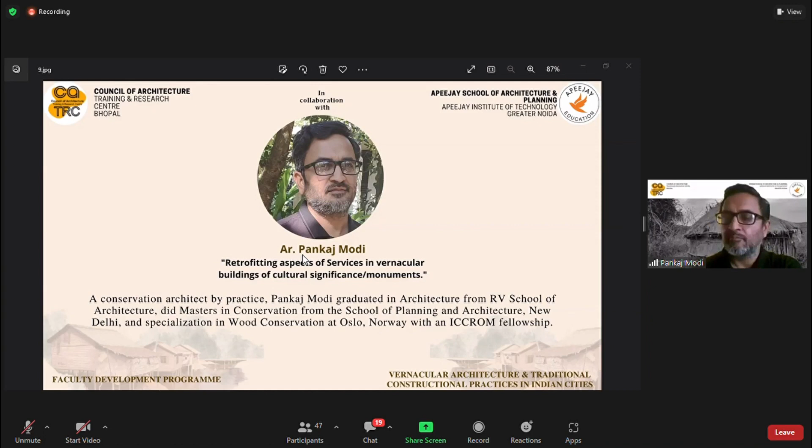So we welcome you. It may be repetitive because Balio and I work together on many projects for INTACH. He often is the contractor because he has a wonderful skilled team in traditional materials. So there may be some duplication, but I try to present it from a different angle for the same projects.

I'll be talking on the services aspect - how the retrofitting takes place, and when we are doing interventions, what guides us, and what challenges we face, how we interact with other professionals, because not everything can be done by us. We still need the support of many other professionals, and it's important how that interaction happens, because they come from a different background and we have a different objective for the project. I'll explain that with the projects.

You've been hearing this, and I've attended many sessions since Monday, but just to reiterate: we are looking at vernacular architecture, which goes beyond just buildings - it goes to the settlements. We are talking of public buildings also, because we shouldn't think that vernacular is just the residence of a few people or communities. There are public buildings too. It's a style of architecture - materials, construction techniques. We are looking at how they've responded to socio-culture, traditional occupations, and the indigenous knowledge and systems that are developed, because they are very contextual.

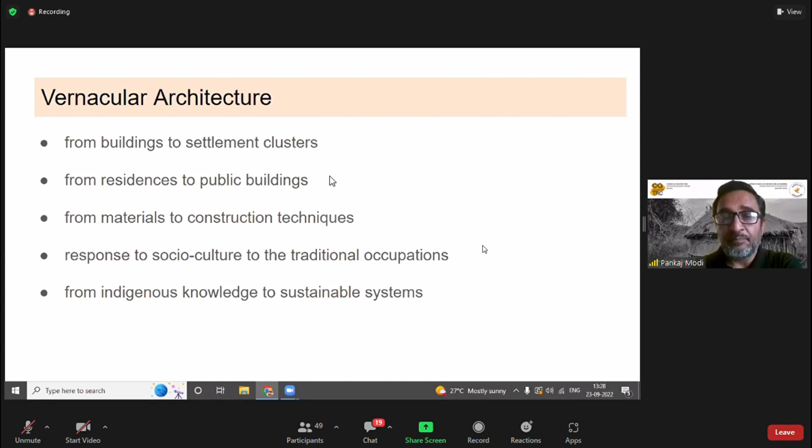One thing very important to understand, if we are calling vernacular a heritage, is that vernacular is an evolving thing. It has its continuity - it's a living heritage. It's got the living traditions, the living culture, and the living techniques, technologies, and materials.

So for whom are we doing these projects? When we are working on the restoration, the question is, whose project is it? Whose heritage is it? Are we going to look at it from our perspective, or is it the community who's living there or who's going to take it up? That big question is always important to ask at the beginning of any project, and there's no definite answer, but it needs to be thought about.

So what guides us when we are doing conservation? Across the board of conservation projects, many things guide us. Of course, there are legal laws by ASI and the state departments, but there are also certain guidelines at the international level called charters. There's this scientific body called ICOMOS, which is also an advisory body to UNESCO, and they have prepared many different charters.

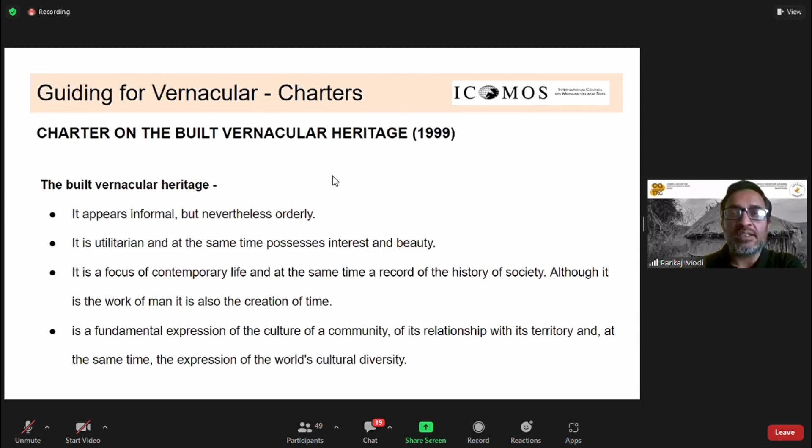How to reduce this, okay. It is a fundamental expression of the culture of a community, of its relationship with its territory, and at the same time the expression of the world's cultural diversity.

And then it gives different kinds of examples which we have been talking about. Many of them have presented on this manner of building shared by the community, recognizable local or regional character, and so on. What's interesting is point number 2 and 3.

The appreciation and successful protection of the vernacular heritage depends on the involvement and support of the community. This is a very important point for us from every angle. Finally, when we are restoring buildings, post-restoration, what happens to the building? Who takes care of it? Who will manage it? Who will continue to live in it? Therefore, how do you involve the community who's part of it, who's going to be part of this? That has to be very well worked out, and they have to be involved from day one, because finally they are the stakeholders - it is their heritage that we are looking at.

Government and responsible authorities must recognize the right of all communities to maintain their living traditions. It clearly recognizes that there are living traditions there - cultural traditions, building traditions, whatever we are talking about. Many times there are also management traditions which are much more successful than implying modern methods of management and so on. So at all levels, this has to be thought of.

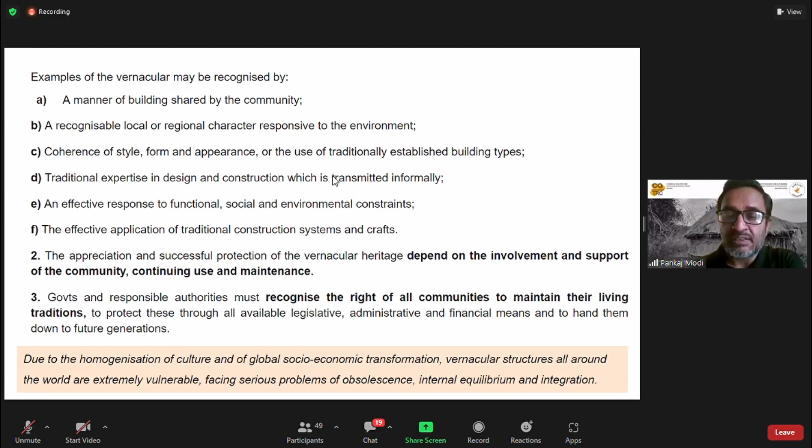Due to the homogenization of culture and of global socio-economic transformation, vernacular structures all around the world are extremely vulnerable, facing serious problems of obsolescence, internal equilibrium, and integration. So what are the principles when you have to conserve a vernacular heritage?

This again, the charter says that it has to be a multidisciplinary exercise. Contemporary work on vernacular buildings should respect their cultural value. It doesn't stop you from that - if you consider it heritage, it should not expand, it should remain that way. But how does a contemporary addition respect the cultural values, which is what gives them their character?

The vernacular is only seldom represented by single structures, and it is best conserved by maintaining and preserving groups and settlements. I think this has been reiterated by many over the last few days, that how we are looking at clusters and settlements is an integral part of the cultural landscape.

Now, this is very broad-based thinking - what we are looking at is a landscape that has been defined by man, defined by the traditions, defined by the culture. So finally, the settlement that has emerged, the built form that emerged, is basically a product of that. So are we recognizing that landscape in which this vernacular heritage becomes part of? Sometimes the religious landscape is there, cultural landscapes are there. So we need to have this understanding of cultural landscapes.

We need to take that recognition of the vernacular beyond just looking at the building traditions, but with a deeper meaning that it may have. So vernacular embraces not only the physical form and fabric of the building structure and spaces, but the ways in which they are used and understood, and the traditions and intangible associations.

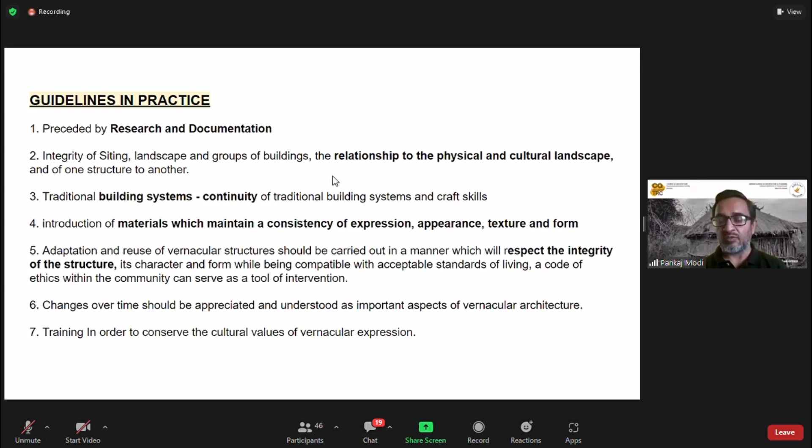Training in order to conserve the cultural values is a very important step, because they say the continuity of the building traditions and so on can happen only with the training, capacity building, and so on. So these are the advices and guidelines which the charter presents.

So I have a small disclaimer to make. The projects I'm going to be talking about, some of them are clearly vernacular, but there are other examples also I have taken which may not be directly from vernacular, but from the services point of view when dealing with a heritage building. The point is, can these be adapted to any of the projects you may be doing tomorrow? So that was the whole idea, that I am taking projects or examples even from some of the other typology of buildings.

So talking about retrofitting, where does that happen, right? At what levels are we looking at retrofitting? It can happen at the structural level, wherein the entire presentation by Mr. Balihus, who was there earlier, he was talking of structural retrofitting works. It can happen at the spatial level, when you have to modify certain spaces, when you have to do a reuse, there will be spatial modifications that come up.

Then at the materials level, what are the materials which are there, traditional materials, new materials, compatibility of it, all these things are to be thought about. So there also the retrofitting happens, consolidations happen. Then, of course, the services, like how do you look at contemporary services being included or integrated into that built form?

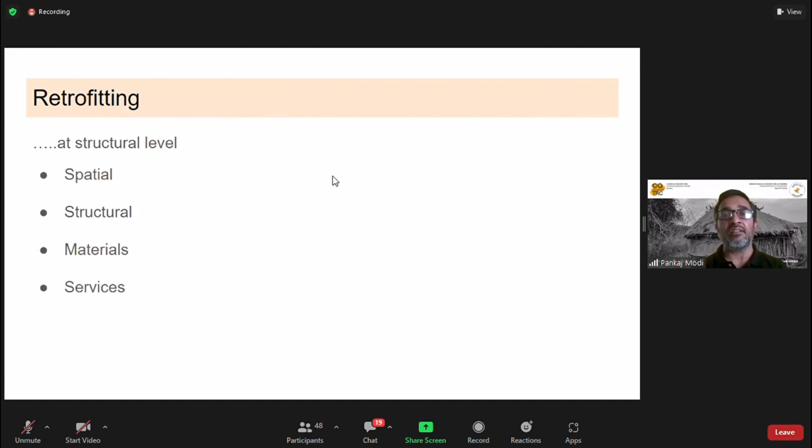So when does the need for this retrofitting emerge? One, maybe when we are looking at upgrading the lifestyle. People living there want a better lifestyle, a better quality of life. Maybe they want better quality of lighting, or modern amenities, like toilets which have to be more in line with today's comfort level. All these things have to be thought about. It's not like we want them to stay in the same way the building was meant to, or was built as. So that adaptation has to come, that upgradation has to come, and that becomes one of the challenging things.

Now, sometimes it's a subdivision of the property with multiple owners, so each owner will have their own requirement. There may be modifications required according to that, maybe everybody wants a kitchen, a bed, a bathroom, and all those things which are required. So that again leads to retrofitting in that particular place. Adaptive reuse, when you're completely changing the use for which the structure was built, may also lead to retrofitting works.

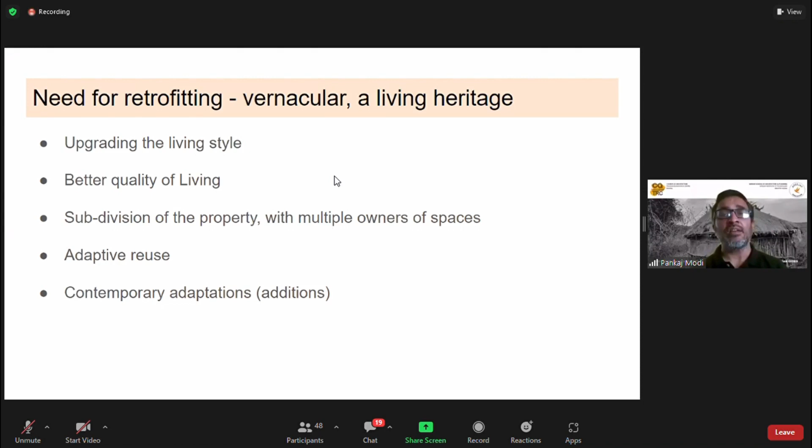Then we have additions that we may do, as we are adapting it in today's context, and that structure may lead to certain additions or requirement of additional spaces. At all these levels, we have to be careful about what values are embedded in that vernacular, and whether we are looking at continuity of these values. Conservation actually means maintaining that continuity and keeping those values intact.

So what are the challenges we find when conserving many vernacular structures? The traditional knowledge of construction, materials, and services is an area where a lot of research is yet to be done. Research is happening, but there are not many people available who are trained in this, so that remains a challenge. We do a lot of documentation to begin with, but we still need more information, because vernacular architecture changes from region to region, area to area. We can't have the same approach or methods everywhere.

Retrofitting with modern methods versus traditional methods - are we not going to use any modern methods or new techniques available? Why not? The whole idea is respecting the values, continuity of the values, and compatibility. If we are able to do that, then even modern methods may be applicable. So we try to do research, a lot of literature study, and we look at examples of where it has been executed. A lot of dialogue has to happen before we conclude that something may be acceptable. So it's not just that only the traditional approach is right for vernacular - we are looking at a synergy with new things that are coming.

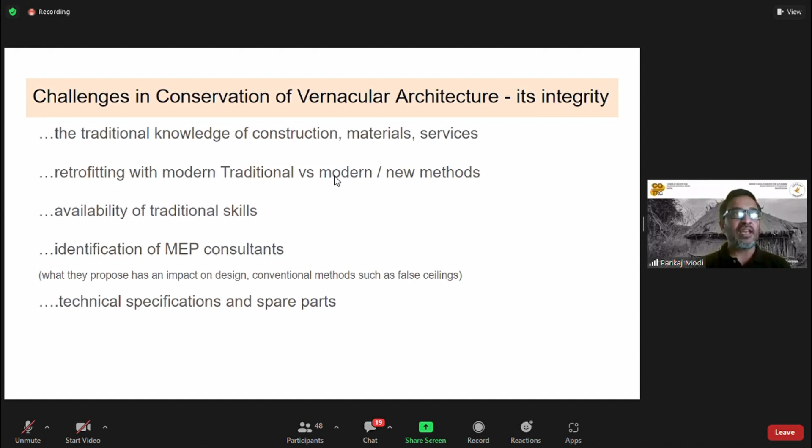And sometimes we also need to know - okay, these are fantastic products, but what about their efficiency? What about maintenance? What about spare parts availability? These are questions we have been asked by our clients, especially those who are very thorough about their service requirements, when we go for interventions. Again, something we have to be aware of.

So the approach which we generally take is a documentation-first step. And it's not just measure drawing. Many times in colleges, documentation is understood as a measure drawing exercise. No, it's an understanding that develops from the exercise of measure drawings, archival research, and all those things.

We try to approach it so that solutions for services and so on can come from the design itself. If not that, what are the traditional methods which are available? We try to do research on that too, moving around the surrounding areas to explore what is happening in that region and what the familiarity is, because many times those solutions work much better.

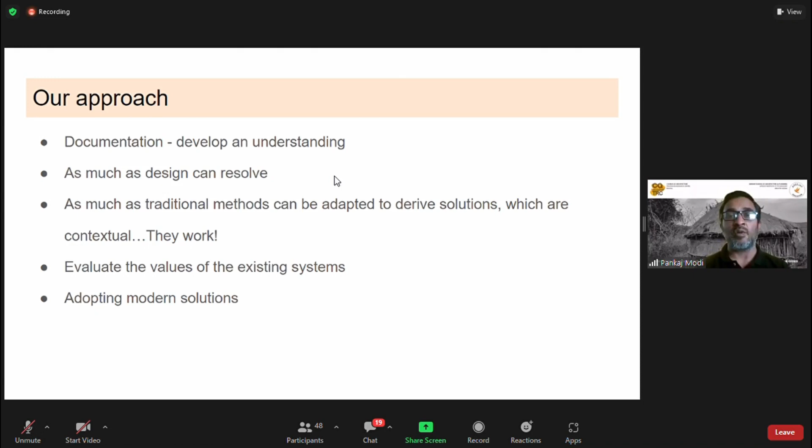Take examples of water systems and all that—these are fantastic things which are so contextual that local solutions are more applicable there. We evaluate the values I've been talking about, and in case these traditional methods don't work, we look at what modern solutions can be adapted to this particular place. So generally we try to make the modern solutions the last resort. If nothing else is working, that is better.

So this is what I'm talking about—spatial retrofitting. When they wanted to shift to this place, it had to adapt to their living standards. It needed the requirements of, let's say, three rooms. It needed a nice open space where they could have their coffee, and all those things were there. But the structure was quite small, so how do we do it?

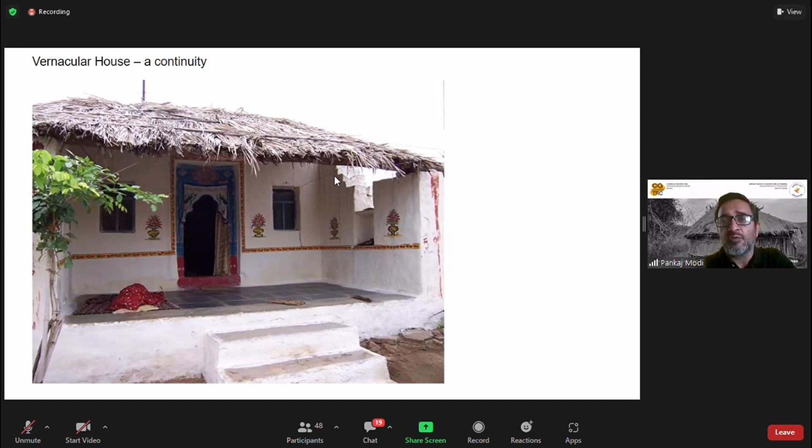Again, this is in Anegundi—not a project we have done, but the Kishkinda Trust, which works over there, has taken a lot of the village houses and converted them into homestays, which is quite attractive because it's very close to Hampi. You just cross the river and Anegundi is there. It's also one of the historical villages which is in the core zone of the World Heritage site.

And these are the kind of spatial transformations that are there. Some things you live with—for example, you cannot always have attached bathrooms; you have common bathrooms, so you live with that. That's a quality of life. And even as a tourist, if you're going and staying there, that quality of life becomes acceptable to you.

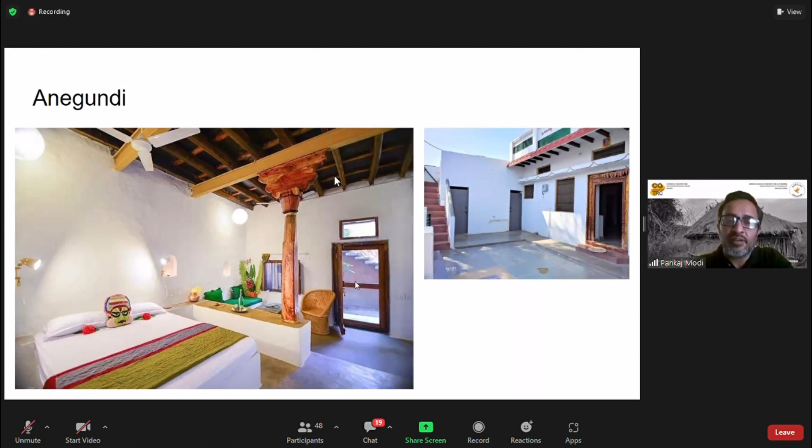And then there are structural retrofitting works which also were there, and then you create spaces in this way.

The point is, again, the values that you find—the spatial value can always be enhanced. It's not that your interventions are taking away the values, or becoming jarring, or negative to that place. If you're making modifications in a living heritage which allow for a better life, then it is acceptable.

So this is what I was saying about false ceilings. Earlier interventions—people have done false ceilings, but it hides the entire beautiful ceiling that's there. They do this because it's easy: one, light fixtures become easy for us; second, whatever's happening in the roof, anything falling and so on, it all comes and rests in the false ceiling area.

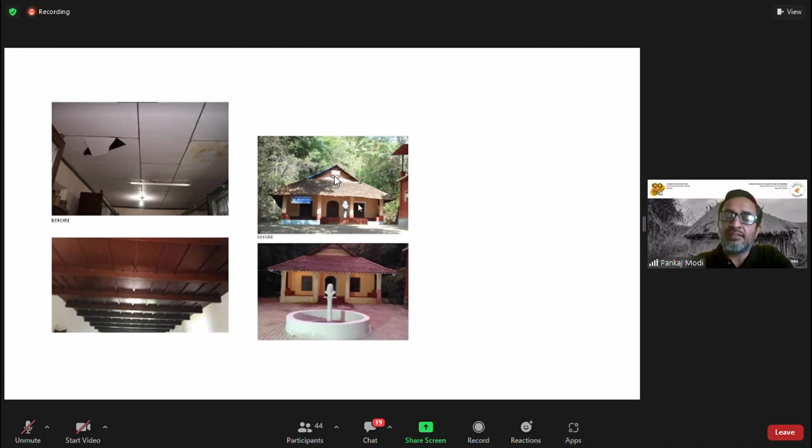So this is a structure—not a birthplace, but where a Jnanpith awardee from Karnataka, Shivram Karanth, used to stay and has written great literature. So this was restored.

Many times, I just picked up this slide—of course this is from Kerala—but what I'm trying to bring out is, many times in the design there are certain features which we need to understand have already been incorporated to address certain climatic requirements. Because in Napier, for example, they had a cavity wall.

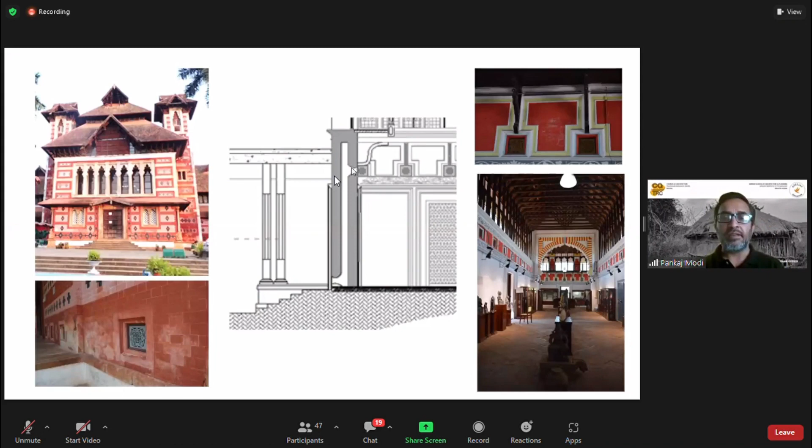So when we are moving around this kind of museum space, we see these openings on the top, and on the outside it's at the floor level. We couldn't relate to it while documenting it inside and outside separately. But when you start understanding your building in sections, your materials, your wall constructions, you realize that this is actually a cavity wall concept taken to a large public building that is being built. And this worked so well in that place to keep it comfortable.

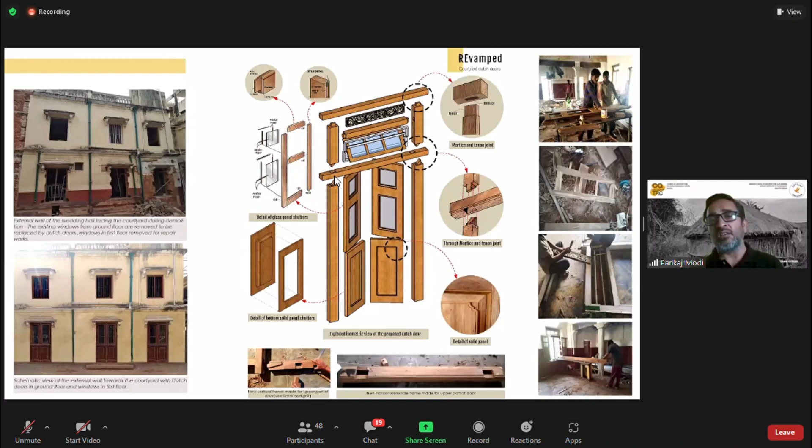Or joineries—this is something we document, because when doing retrofitting or alterations, it's important for us to understand the traditional joineries that are there and see if that can be used in the way we want to modify things.

So again, things like the circular windows, as we see in rose windows, it's basically about dissecting the elements. This can happen only when actual work is ongoing, that we dissect it and completely understand the building process of it—like what kind of joinery is there with these wonderful elements.

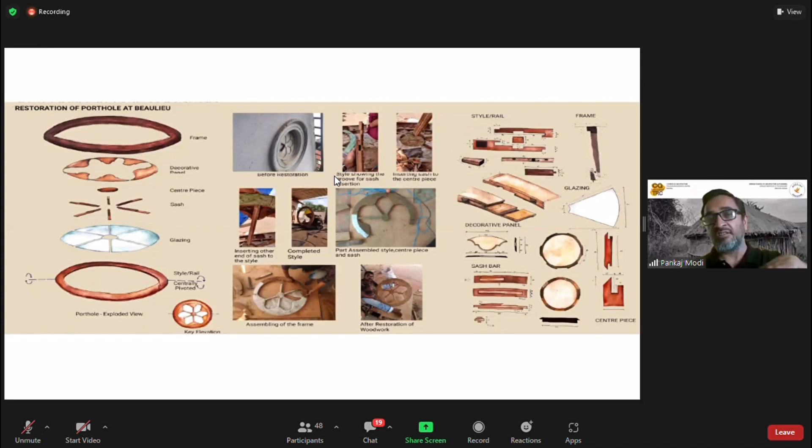What just looks to us like two circles when we draw, and another circle which shows glass, has such complexity in the way it's been done—because how the material behavior has been understood by them is reflected in these things, like how to make wood circles and join them and so on.

Coming back to Shivram Karanth's house, again, as I keep talking about traditional systems and traditional materials, it's so important to understand.

One demonstration is in this project: when restoring this place, there is this roofing where you see there's no vertical element. We've always seen trusses with either vertical or diagonal elements holding the compressive forces coming in. Here we had some other way—this is called a scudum, in this coastal region kind of construction, where it's all about countering the forces coming from the opposite direction. This one element is actually holding it all and balancing the entire roofing.

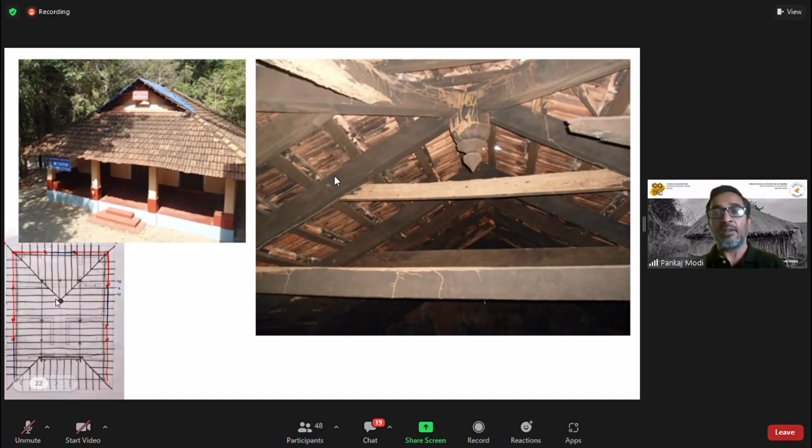So on plan, if we see, this scudum comes here where the diagonals go this way. It was so important to understand these scudums and the concept of how the structural roof is done, because we had to replace this member—it was termite infested—and we had to design it in the same way.

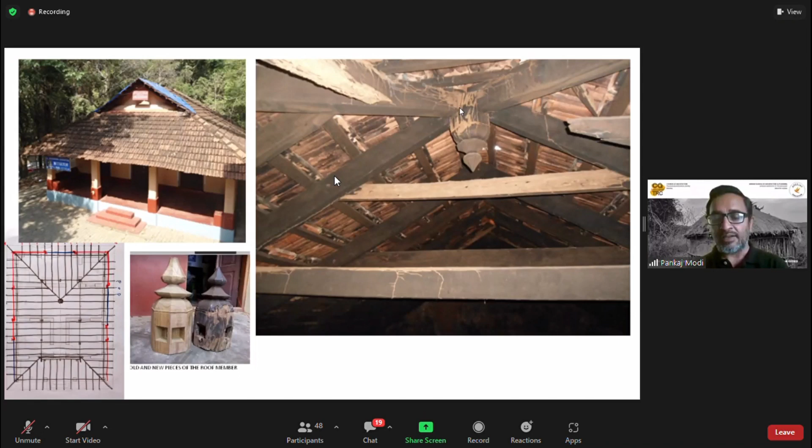When you start getting into the complexities of it, you see these gaps are made with angles wherein the diagonal rafter can come and get locked inside. This is how the carpenters are working on that—all traditional carpenters who understand this system so well.

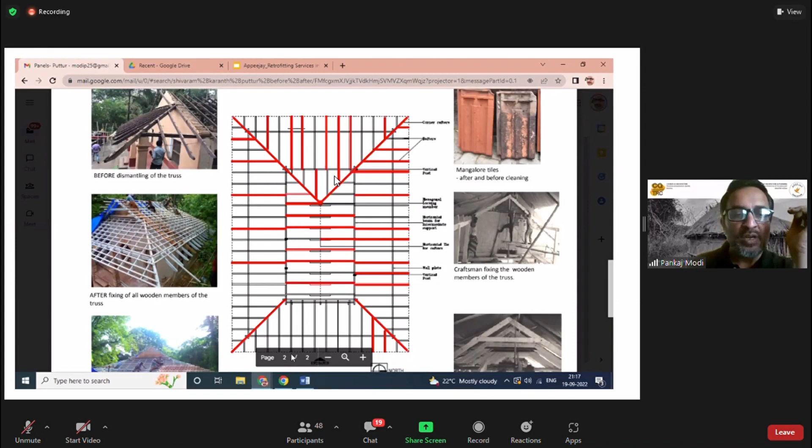Then there's the entire traditional roofing, which Mr. Balasu pointed about the Mangalore tiles. So now we're talking about the structural retrofitting of the sloping roofs, which we have done, and the flat roofs, or jack arch roofs of traditional Madras terrace, lime surkhi.

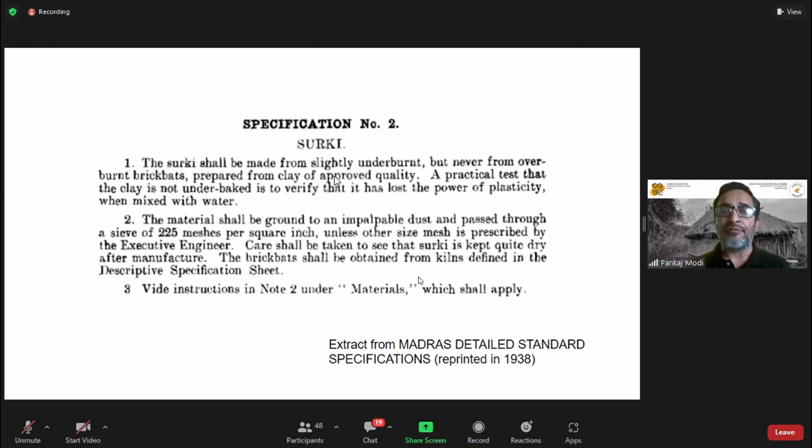We also do research on the historical documents which are available. What do they say? How do they describe the material, whether it was lime, what kind of lime to be used, how should it be processed? All these things we try to research and understand.

Similarly, using mud. Shivram Karanth's house was built with laterite and mud. So we again had to go locally, source somebody who could do this, understand how it has to be done, because the stitching and all were carried out with that mud mortar itself, since compatibility becomes very important.

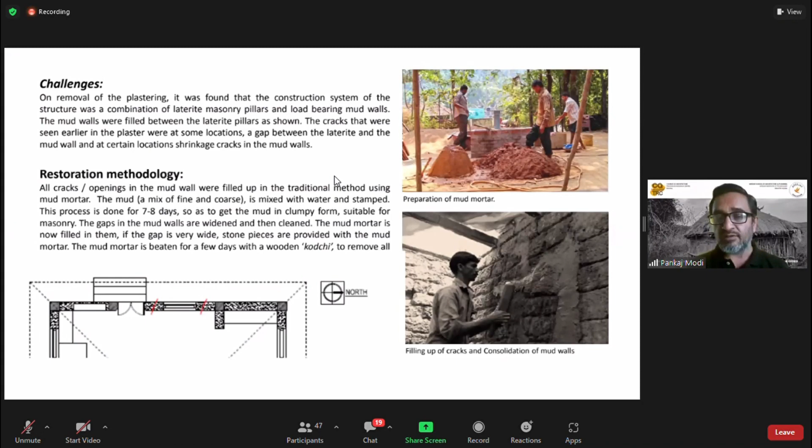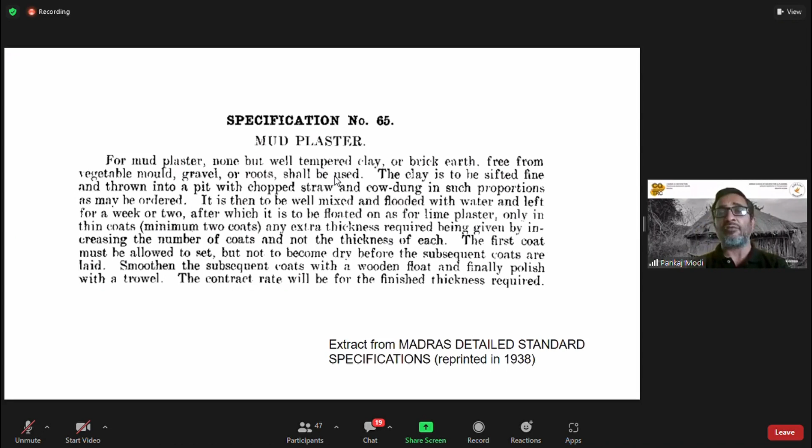You can't use a very strong mortar when you're doing structural retrofitting. And then again, we have these old PWD specifications which talk about what kind of mud to be used, how it's to be processed. Of course, there will be traditional ways of it also, but this just helps you keep a check of that.

This is one project in Dharwad where we were again talking about retrofitting with materials and traditional knowledge. When we were doing this reconstruction, because there was a collapse, and when there's a collapse, it's a wonderful opportunity to understand traditional systems, like how the roof is built, what is the cross section of the wall, etc.

So we had an expert, Dr. Yogananda, who understands mud architecture, mud as a building material. We took him around, and it's quite interesting that we found this is a place with black cotton soil, meaning this soil is not so easy to use in construction.

So how were they building it in that case? I mean, they couldn't have been transporting good mud from somewhere far off. That curiosity made us go around the places and check whether today also they are building in mud. If so, how are they doing it?

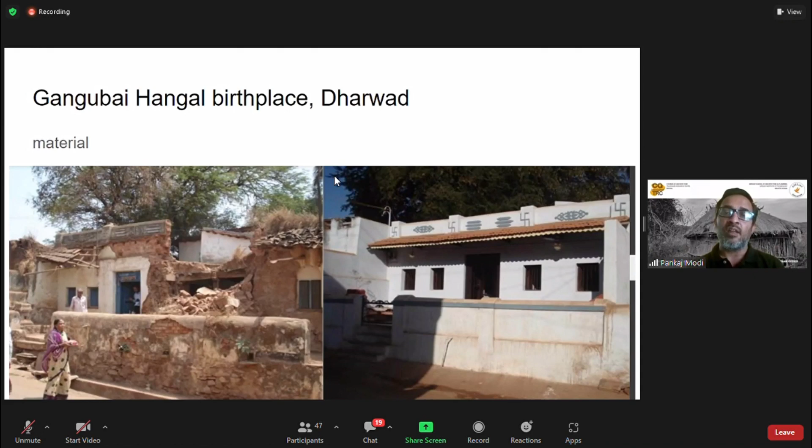We found that when we went to some villages, they had a certain process, they call this hale mannu, which is old mud. They dig a pit outside the village and add organic waste to it, and it's called hale mannu. Then that processing over time modifies that mud, making it suitable for construction. So there are traditional ways of how this is done.

Now, looking at the next aspect of retrofitting, like electrical, what are the various aspects that come into picture? Again, as I mentioned earlier, we do take in consultants for many of these projects, but it's also important that we control the project because we understand the values, we understand the character of these places.

For example, the electrical layout, we of course prepare. Can the layout be something that can also enhance the character of that building? The other aspect is the conduiting plan. Many times as architects, we are happy to do a layout and then pass off the drawings, but when we're dealing with heritage buildings, the conduiting plan becomes very, very important. You have to show where the conduiting will go, and there are different ways of conduiting.

One we all know, and which is generally followed, is the concealed conduiting. But many times, if you're not replastering that area, if there are important features which are there, we go for exposed conduiting. In that exposed conduiting, because the entire system will be seen, it's very important you work out your routing. We do that in all our projects - we work out the routing, get it marked on the site, cross-verify it, and then give an approval.

Many of our projects have this wooden casing conduiting system. So whether you're doing concealed or this, it's better to work out. Even in concealed conduiting, I will show you what can happen.

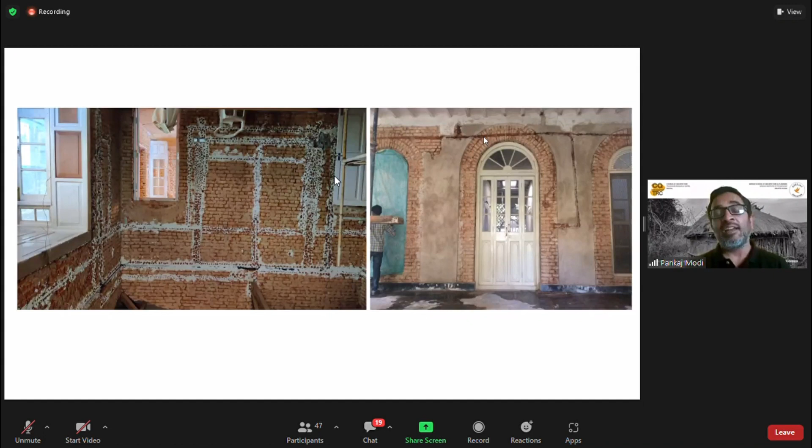So it's very important for us that we do a conduiting plan - types of fixtures, what kind of fixtures you need, what modules you need, which kind of switches you need - to work to that level of detail, which is most suitable for that space.

Today we have requirements like one building Mr. Balos showed about the government school in Shivamogga. Today there are needs for smart classrooms. Now you can't deny that. It's like a vernacular public building which is there, and it will be upgraded so that the students get the benefit of smart classrooms.

But how do we integrate that? How do we integrate the LCD projectors, the screens that have to come down, the writing boards that are there, all of which means extra switches are required, UPS systems are required. We need to integrate those things. So this is how we work.

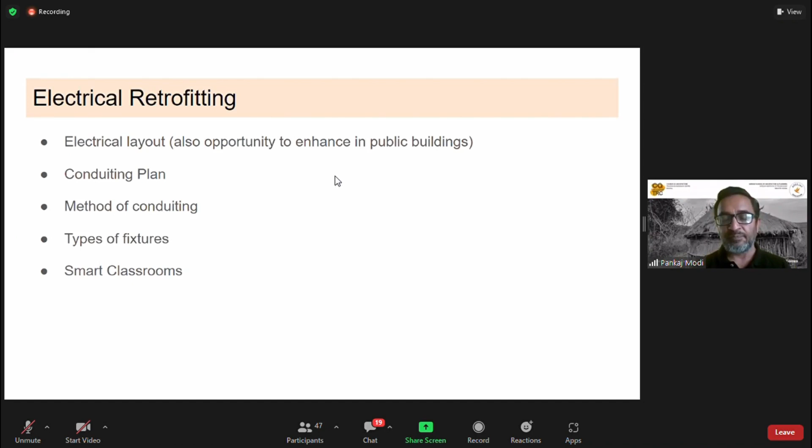So where can it run - whether it will be next to the rafter, it can't be in between two rafters and you start seeing one more element. So how do you take that out? So all those things are worked out in great detail, and then we get it marked.

Because many times there's a gap - all these technical drawings are not very well understood by the craftsmen who are there, unless you have a very good supervisor. They understand, if you've been working with them for long, how you see the buildings. But otherwise, it's better and safer to get it marked, so you know you are on the same page, and then you get it executed. So this is what we do.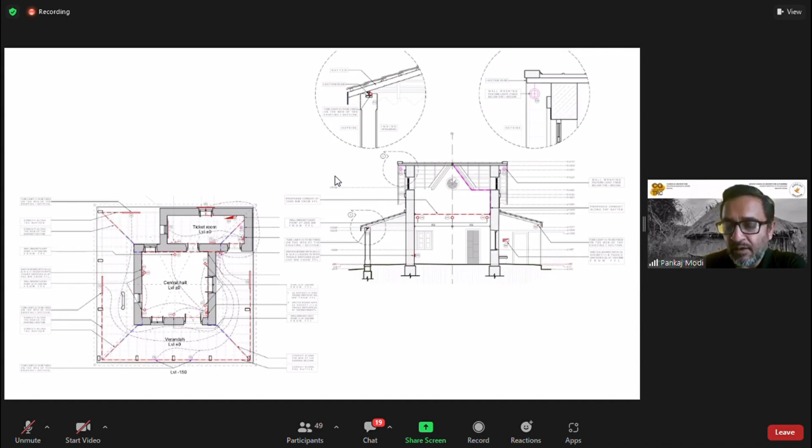These are the kind of light switches we sourced. So this is lighting we have done in that building, this is at night. It's a combination of colonial and vernacular for all these station buildings that came up across the railway line. So we sourced these switches.

They're available at low cost prices, they're available at high cost prices. There are certain brands which are still selling them. This again is many times a complaint - okay, kahan milega, who will have it? Nobody has these kind of things, because easily it will not be available. Like if the contractor is not willing to do it, he will give these excuses. But here, as we said, we are working with a sensitive contractor who's in the heritage field.

And then we also do this market search when we know what product we want, and we go to the market. Maybe after the 5th or 6th shop, they will tell you, okay, why don't you go to so-and-so shop, they will give you this thing. Or there are certain brands when we come across them - if you're looking at a high-end range of a similar style, there are brands like Clipsal and SSK, and brands like OK and others who are still making these kinds of products.

Again, this is all exposed conduiting. So when you're doing stone work, you really can't do concealed conduiting. So in exposed work, how do you do it? What kind of boxes do we make?

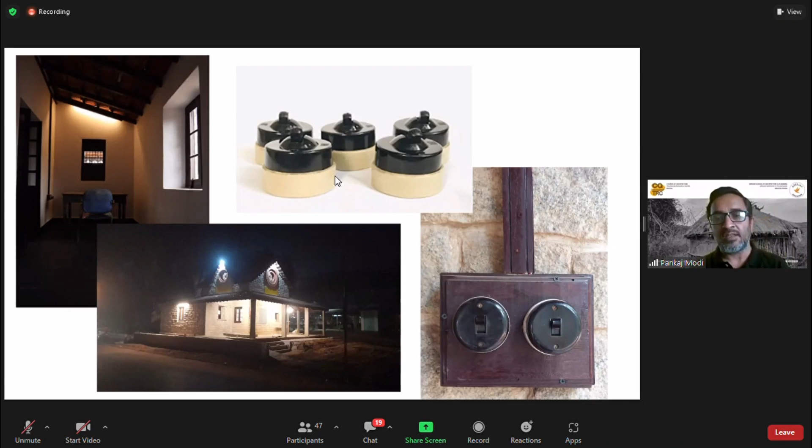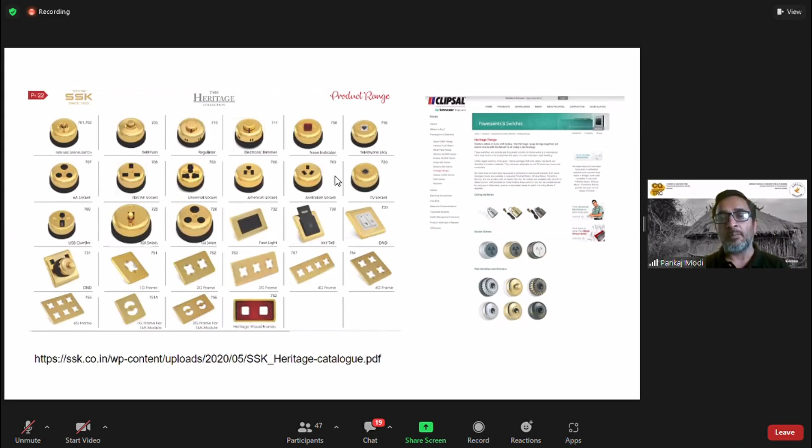This does work in some kind of public buildings which have been upgraded as, let's say, a public hall or a memorial, a place where talks and such can happen.

These are available. Another example I'll give you about how the design gets changed because of the requirement from the services. This is like a gate which we are doing for that house, which has now become a guest house in Guntur for ITC. Very built in that traditional style of Mangalore roofs and mud architecture and all those things.

Now, we made some beautiful gate design and all. And then the client came up with a requirement that no, they want a gate which can open on its own, which is like a remote controlled kind of thing. You can't expect somebody to always come and open the gate and so on. So basically, which meant, how can we automate these gates?

So then we looked for consultants, they looked for a consultant, and they came up with Schneider, and we worked with them like, okay, what are their basic requirements? How does a gate automation work? There will be some kind of mechanisms, and then there will be things like a large rectangular box which comes on the gate, and that will help in making it open once the signal is given from inside.

So basically what happened is the positioning of their boxes, that element on the gate, had to make us bring in some changes to the gate design. Earlier we did not have this element, we just had the verticals. But later on, when this box was required, we had to introduce some element which could conceal that box for both the gates. And then the gate had to have a minimum requirement, it cannot be wider than so much and so on. So all these things were discussed, and the gate design itself was adjusted to incorporate this automation which was required.

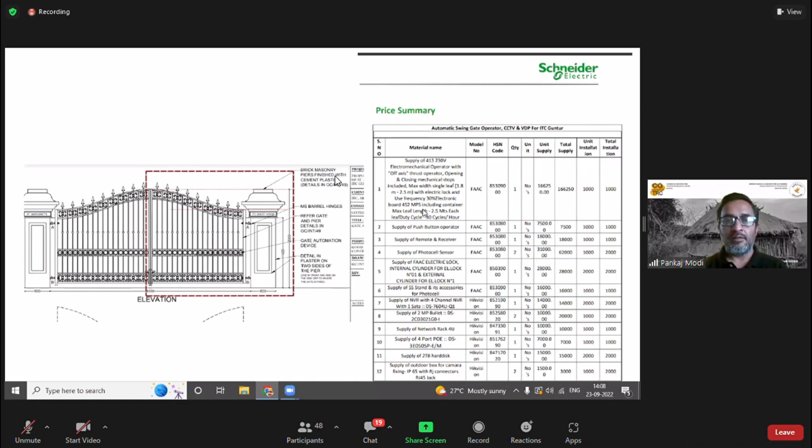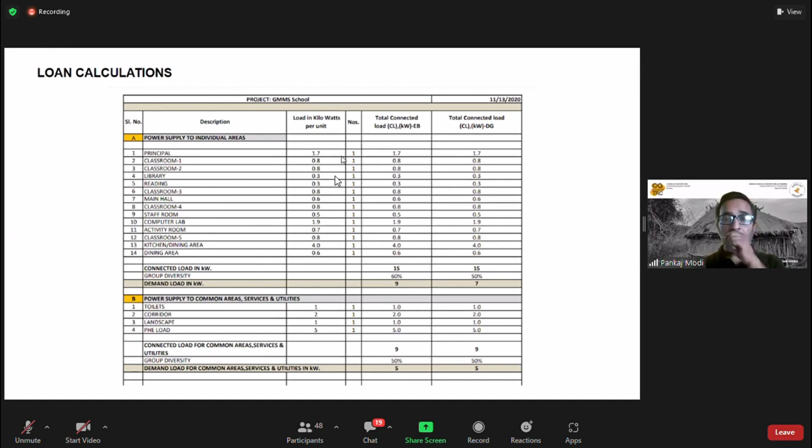Then in electricity power calculations, it's again an important step where we are part of that process, like how much kilowatt of electricity is required for that building. Now that again comes from your design, like what have you proposed? What kind of lighting fixtures have you proposed? What kind of UPS systems or generator system have you proposed? Because all this becomes important when you're upgrading something, especially in adaptive reuse projects, since these become mandatory requirements. And then if they need a DG set, they need to know how much consumption of power the DG set has to be. So we look at all these things and we confirm whether this is okay or not.

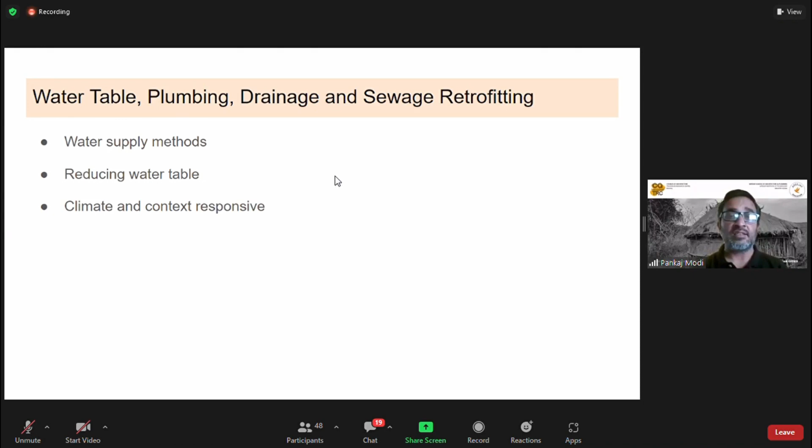And then again, in other aspects of services, like it could be water table, plumbing, drainage, sewage, we again are working along with our consultants. As I said, many traditional methods we are adopting.

We got a hydrology expert and we explored with him how to do this. So the biggest options which were given, one very traditional option, was just do wells, open wells, which will draw out the water, and therefore the water table may reduce in this particular surrounding of the building.

So we presented that case to the municipal commission, but what that demanded is that it needs to have pumps which will draw out the water and put it into a drainage channel. Now the question was, who will maintain this? Who will do all this pumping business day in, day out? Whenever the water level rises, you need to pump that out, only then it will draw out the water from the ground. So we understand these concepts when we are discussing with the hydrology person. Now that was a fantastic system, works very well, but then it's got management and maintenance issues.

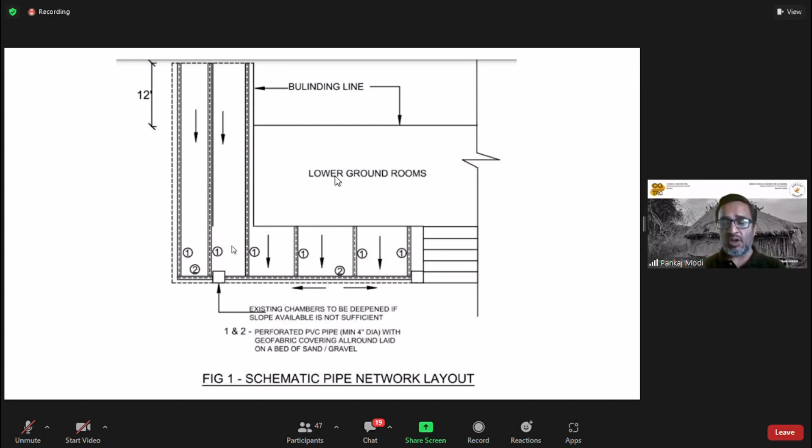At present, overhead tanks are another major issue when it comes to these settings. Now, how do we give overhead tanks in places where heritage buildings are such a strong visual feature? If you have to give tanks above the roof, imagine it's a sloping roof structure, you can't give an overhead tank. Will you do a metal stand next to it and then put an overhead tank? Not really a great solution. I mean, in the worst case, this is the simplest thing, and people have done that. But if you want an alternative, what are the ways in which we can do a water supply system which does not affect the aesthetics or visual integrity of that place?

So one of the things that we worked out in the Ooty project was the hydro-pneumatic systems. And this is a project from Tarangambadi, which was done by Ajit Kaujalgi and INTACH Pondicherry. So they did a beautiful setting. It's a Danish settlement which they have restored.

And in that, to work out water supply, they made a beautiful masonry building with rooms and the water structure here. So this is your storage tank, but then it integrates rooms and spaces and a nice vernacular character through pan tiles and stone pillars and so on. So this is one beautiful design way of integrating the need of services into your building.

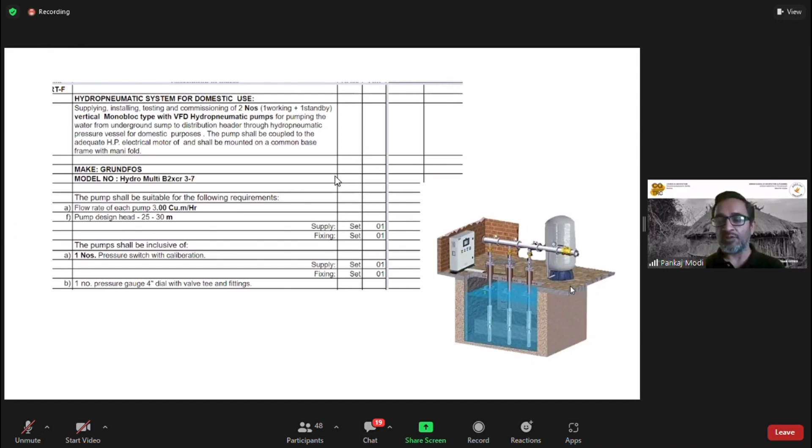And then came the detailed specifications of it. Again, I'm not going into all those things. Many of the things even I don't understand, though I did ask them. But yeah, only when it gets executed do you pick up some of these things. But some of these things are very, very technical. As a conceptual framework, it has to follow your objective as a person who's leading and controlling the project. And that goes with everything, like what kind of pipelines you're looking at, how will your drainage be, whether you're going to have the concept of a catch basin or open saucer drains. These are things which you need to work out.

The details can be given by your consultants, but conceptually this works well. Then there's the concept of heat pumps, and water harvesting pits we try to create in this place. What are the details of that - how will it be built, and whether it's a recharging well or something that will recycle the water - all these things you have to work out with your client.

What is the requirement? If it's a recharging pit, it's a different concept of construction. If it's water harvesting and you're going to use that water for landscaping or for flushing and so on, it's a different way of working. This is what we do even in our modern buildings, so it's the same concept we try to look at in historical or heritage buildings - it's just adapted to that particular typology of building.

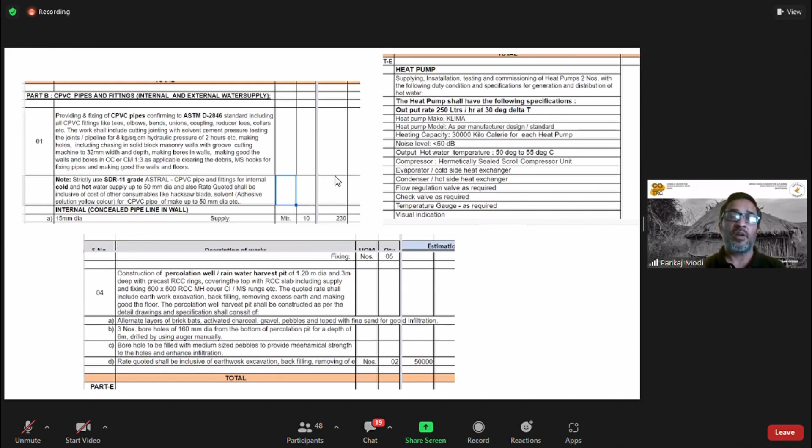Then there are many other things that come up in our projects, like heating - if you're building in places which can get very cold, down to 0 degrees or sometimes minus degrees, how do you keep the place heated? Lightning arresters - if you're building on hills, you need lightning arresters. Some of these are mandatory requirements as per the law, but if you're doing a vernacular kind of building, how do you incorporate these requirements?

So this was for lightning arresters. This is that Ooty building I've been talking about - these are some structures within those premises. It's a mandatory requirement because it's a public place. Once it's a guest house, and ITC being a brand, they said we will follow all the laws to the core. So where do you provide your lightning arresters?

The consultant came first and said, okay, let's provide it here. He proposed this Ashlok system, which is like 5 meters tall. I mean, my building is not that tall, and they're suggesting some rod that goes out over there. Then there was this whole debate - the trees are still taller over here, so why do we need the lightning systems?

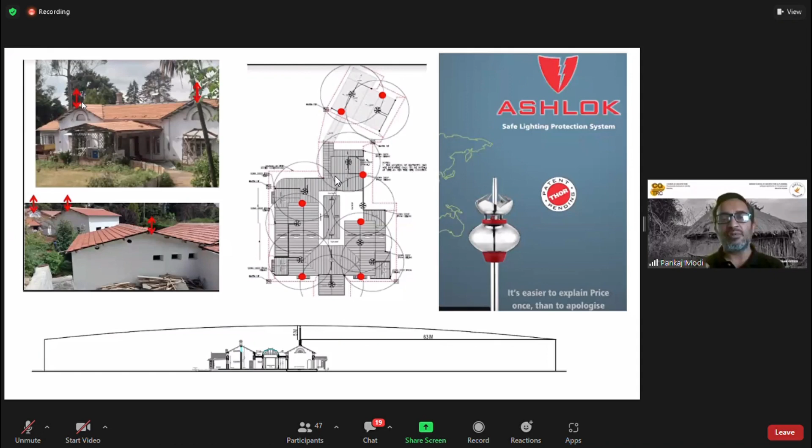Traditionally, the trees have worked well. Coincidentally, just a day or two before, there was news that trees had caught fire because of lightning - not here, but somewhere else. That ruled out relying on the traditional method alone; we needed to do something. So we said, can we do away with these tall things and provide smaller units based on the design and character of the structure? These are things we explored and worked out an alternative for.

Heating - we again debated many concepts when doing Ooty. What kind of heating works best in this kind of structure or environment, where you have high volume roofs and sloping roofs? These are challenges we have to consider, because we can't do a false ceiling and reduce the volume just to make it easier to keep the place heated.

But we wanted that character, that sense of space, that ambience it creates. So we explored again with our consultant - what do you suggest? They came up with radiant heating systems, where the entire floor can be heated, since that's the level where you want the heat. So the heat comes from the floor. The challenge for us was it's a wooden flooring, and we are not removing it.

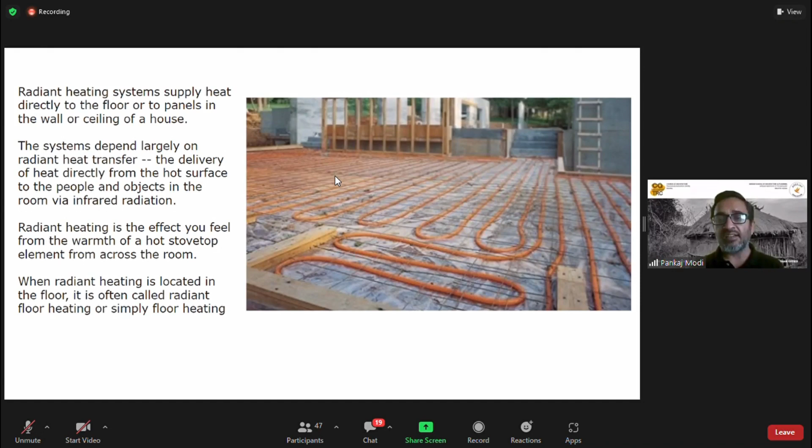Is it feasible then? Not really. But then, are there selected areas where you can do it? Yes, we can do that.

Then there are other methods we explored, like packaged heating pumps which come without an outdoor unit. But the point was, these are imported - tomorrow if you need spare parts, where will you get them from? What happens to this company, and who are the dealers? How much can we rely on this for the long term? That's a question mark, so these are ways to start deleting out systems that don't work.

Then there are these fireplaces. There are companies - it's there in the references in the last section - who are making new types of fireplaces. Some of them just have a heater inside and this visual element that looks like flames, but it's just graphics. Actually, it works like a heater.

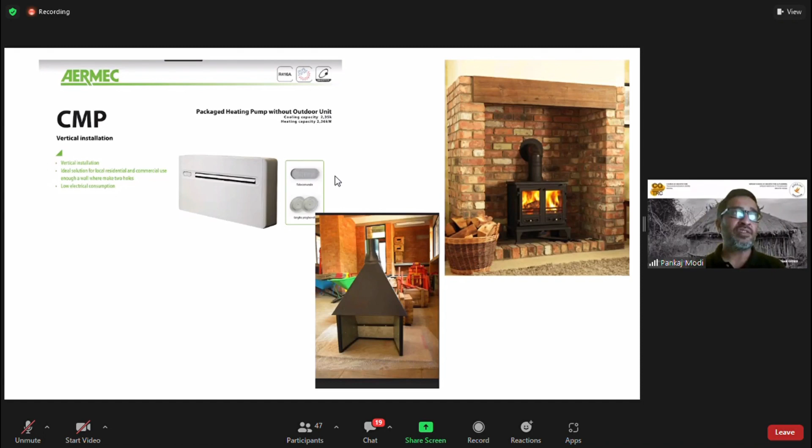There are many such systems that have come out, but there are also people making traditional heaters, so-called designer heaters. That doesn't really work in this case because the costs were hugely expensive. There are also very local-made chimneys or heaters that work very efficiently in the winters. So after exploring all these, we went back to traditional methods of putting a heater in every room, because that seemed most efficient and manageable.

In this building there was a courtyard. In a complete reuse project, we had proposed a courtyard between the buildings. But being Ooty, you can't have an open courtyard, so a glass roof was proposed. The catch was that after we built the glass roof, there was a lot of heat trapped inside. Though we had given exhaust vents on the sides, that was not enough because at times the heat was very strong. In winter it's a fantastic space to be in, but when it's sunny it was bad. So the clients came back and asked us, what can we do now?

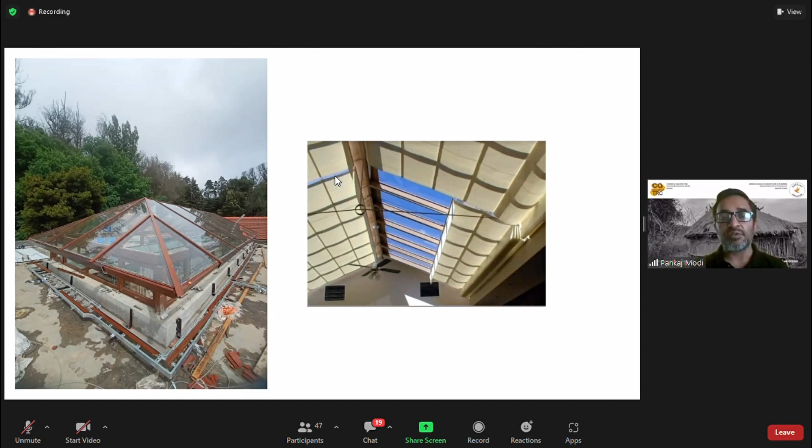So these are all laminated glasses we introduced. One solution was to have retractable curtains, or we could put a film on the glass. Then the question was, what film, which film works better?

We did complete research with our glass supplier, looking at different brands and different qualities of glass, and how much solar energy is rejected. We didn't want to go with the conventionally available film because it affects the quality of light inside, or whether you can see the sky outside. So we were looking at something that wouldn't alter the look of the glass or bring a kind of shade to it.

As architects, we had to decide which would be most appropriate, even though in some cases less energy is rejected, but visible light transmission is also an important thing to look at. So we looked at all these aspects and came up with a specification for which kind of film would work best for this particular place.

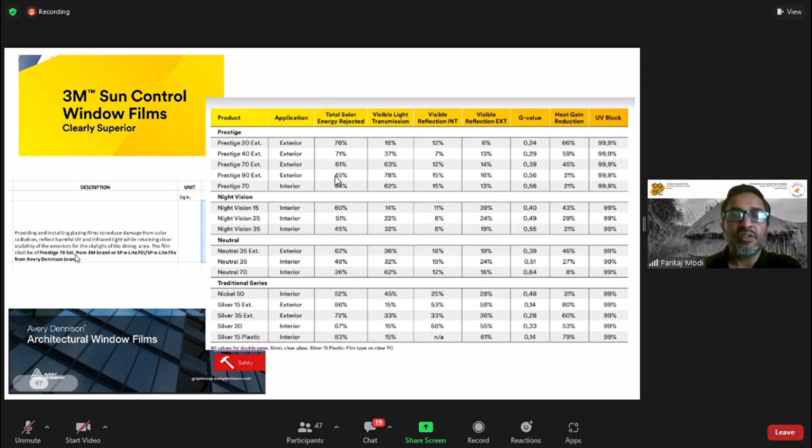One more very important thing we tried out is the carbon footprint—how conservation actually helps in reducing it. When we did this Fort High School building, this beautiful Anglo vernacular structure from 1907, we asked post-restoration, how do we evaluate this?

There was this engineer, Dr. Varsha, from our structural team, who had just finished her PhD and had explored this whole thing. We requested her to do this small exercise for us to see whether conservation actually makes sense, given that the MLA wanted to build a grand new, much taller building there. Is conservation justified from this angle?

So she looked at things like embodied energy, operational energy, demolition energy, and the various materials in this building. A fantastic finding was how, as an existing building, we are conserving much more energy. If a new building had come up in that place, it would have actually been 10 times more energy consuming than what is there now. And this isn't even considering passive factors like how the place is well ventilated and kept cool by the thick walls. The thick walls were considered for embodied energy of material, but the passive aspects of vernacular or traditional buildings weren't factored in—yet still we found 10 times the consumption could have resulted from a new building.

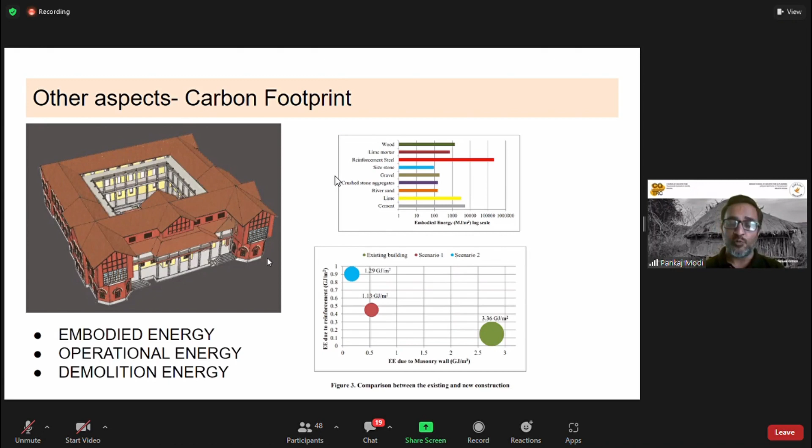These are her observations. I won't get into the details of these.